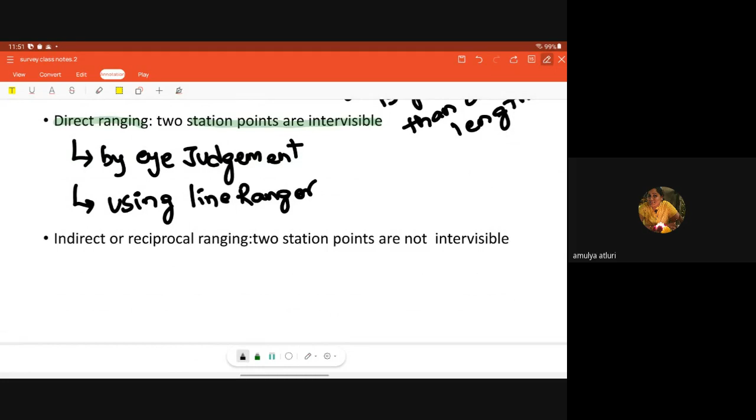What if we have obstacles and both stations are not visible? Then we go for indirect ranging or reciprocal ranging, where the two station points are not intervisible. For suppose this is the case - this is a hill, with points 1, 2, 3 and 4. So these are not intervisible, right? Then what we will do is ranging by help of the random line method.

Random line method is used to establish the intermediate station by reciprocal ranging. So these are the two types of ranging: direct ranging and indirect ranging.

As discussed in the previous class, there will be errors while doing survey - instrumental errors, personal errors, accidental errors, which we have discussed in the last class. Now, what are the errors due to an incorrect chain? When my chain is too long, the measured distance is less. When my chain is too short, the measured distance is more.

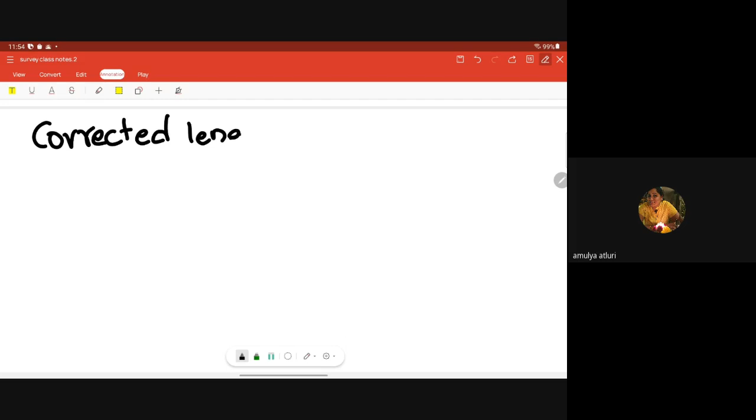Got it? Now let's deal with the corrected length, area, and volumes. How do we find the corrected length? What is the formula? Corrected length: let's suppose l equals l dash into L dash by capital L, by small l. What is this terminology? L dash is nothing but the measured length.

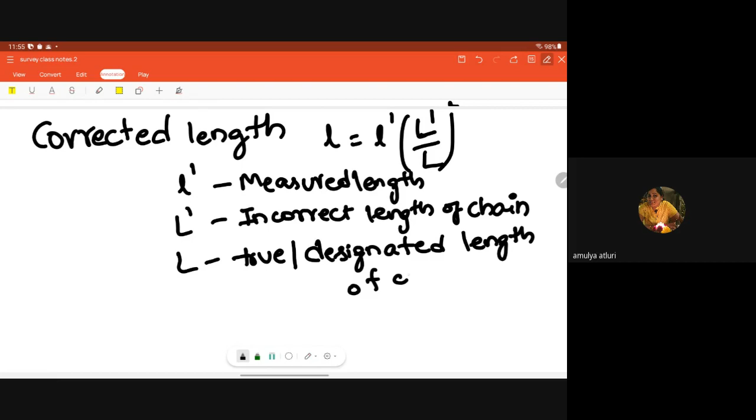Capital L dash is the incorrect length of chain. L is the true or designated length of chain. What is L dash? How do we get the incorrect length of chain? L dash is nothing but L plus delta L - true length plus the error, delta L, the change in length.

L dash is equal to L plus delta L. So if I do L dash by L, then it's L plus delta L by L, that is equal to 1 plus delta L by L. Let's take this delta L by L, or 1 plus delta L by L, as E - it's nothing but the error.

Then what goes with L? L is equal to L dash of 1 plus E. Got this? So this is your corrected length: corrected length L equals L dash of 1 plus E, where L dash is measured length, and E is the error, calculated by delta L by L, the change in length over the true length.

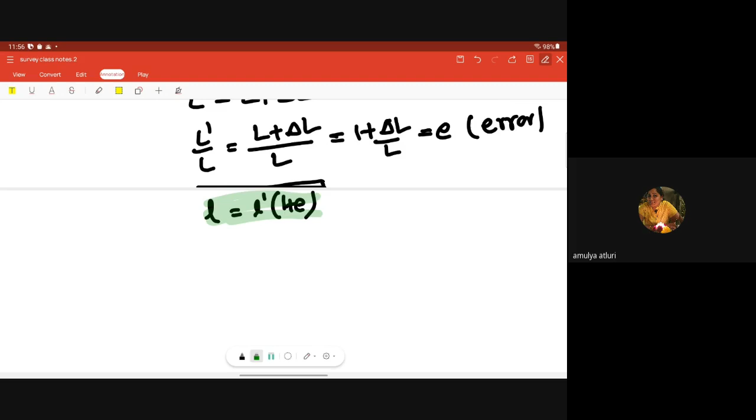Next is corrected area. Corrected area A is nothing but A dash into L dash by L whole square. What is A dash? The measured area. L dash is the incorrect length of the chain, L is the true length of the chain. So I can write corrected area A is equal to A dash into 1 plus 2E.

Next, corrected volume.

So corrected volume V is equal to V dash into L dash by L whole cube. So we can write this as V is equal to V dash into 1 plus 3E.

Got it? Now give me the values for corrected length. Here we will write a summary. L is equal to L dash into 1 plus E. Corrected area A is equal to A dash into 1 plus 2E. Corrected volume V is equal to V dash into 1 plus 3E.

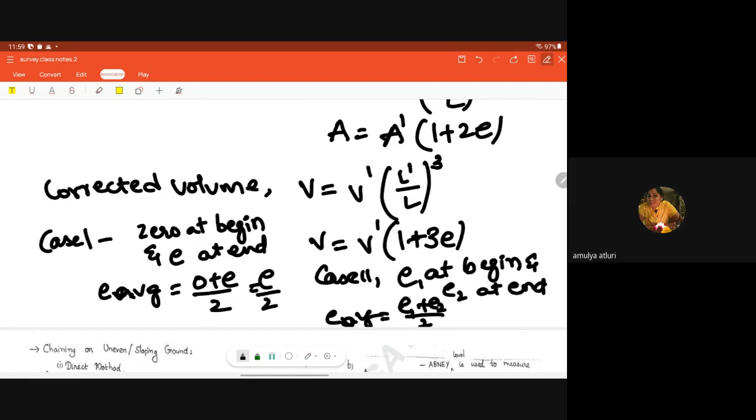In case 2, if we have error E1 at the beginning and E2 at the end, then my E average is E1 plus E2 by 2. This E must be the average. Here E is nothing but E average.

Got it? These are the corrections, corrections for incorrect chain. Next, chaining on uneven and sloping ground.

As you all know, our earth is not a flat surface, we have an undulated surface, right? So because of undulations, there will be error in the chaining because the chain won't be flat. There will be some undulations, sagging, pulling, and like that we will get some errors, right?

So what do we do if we chain on uneven or sloping ground? For example, a hill like this, if we want to calculate the length, direct this distance d, then we will go for the direct method. We will do the offsets like this, and this d can be calculated using summation of L1 plus L2 plus L3 and so on, 1 to n.

If I want, generally what we do is measuring down the hill is easier than going up the hill. If I want to measure this distance, I will just go down, this is easier than going up. So this is the direct method where we can project projections and calculate the length.

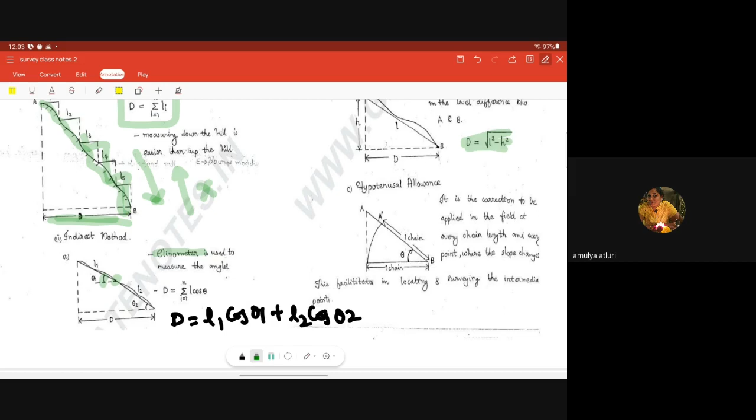Next, hypotenuse allowance. What is that? It is the correction to be applied in the field at every chain length and every point when the slope changes, where the slope changes. This facilitates locating and surveying the intermediate points. As you can see, I can chain till here only.

So this AA dash is my error. Wherever the slope is changed, there may not always be right angular things. So my chain can only go till here because of this curve. Then AA dash is my hypotenuse allowance.

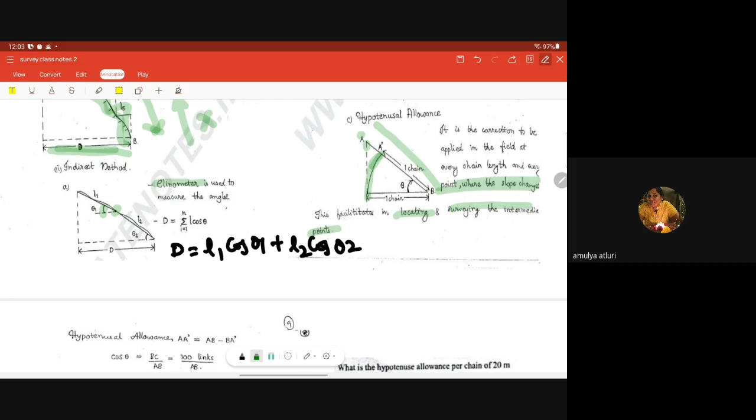How do we calculate hypotenuse allowance? A dash is equal to, from this triangle you can see, AA dash is equal to total AB minus BA dash. So hypotenuse allowance AA dash is equal to AB minus BA dash.

Then how do we calculate theta? Cos theta is equal to BC by AB. This BC, we take one chain which has 100 links. So that BC is nothing but a chain having 100 links.

Generally, as we discussed in the previous class, metric chains are of 20 meters and 30 meters. For 20 meters chain, we have 100 links. So I'm considering this BC as 100 links divided by AB. So AB is equal to 100 secant theta links, it is 1 by cos theta secant.

And when the slope is given as 1 by n, not as theta, this theta is generally considered as tan theta, and it is considered as 1 by n, slope, opposite side by adjacent side. So AA dash is equal to 50 by n square links. So 50 by n square into the measured length will give you the hypotenuse allowance when we measure with a 20 meters metric chain.

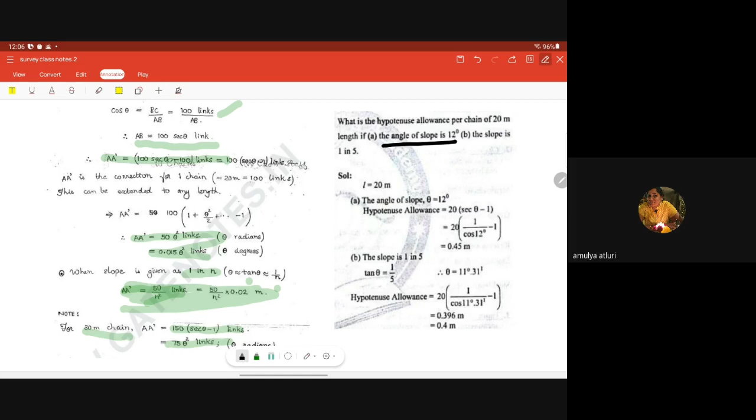So this is one of the most asked questions. Let's see one example. What is the hypotenuse allowance per chain of 20 meters length if the angle of slope is 12 degrees, and the slope is 1 in 5? So we are given the length of the chain equal to 20 meters, and the angle of slope, that means theta is equal to 12 degrees. They are asking us to calculate hypotenuse allowance.

As we know, the hypotenuse allowance is equal to the measured length into secant theta minus 1. So it is given chain of 20 meters length, so it is 20 into secant theta minus 1. Substitute theta as 12 degrees, then we get the answer as 0.45 meters.

And in the second case, the slope is given as 1 in 5, it's like 1 by n. As we discussed, theta we can take as tan theta. Tan theta is equal to 1 by 5. So from that, theta is equal to tan inverse of 1 by 5, then the value is 11 degrees 31 minutes.

So what is the hypotenuse allowance in this case? How much length did we measure? 20. So 20 into secant theta minus 1, that is 20 into secant of 11 degrees 31 minutes, so 1 by cos 11 degrees 31 minutes, minus 1. So here comes your value, 0.396 meters.

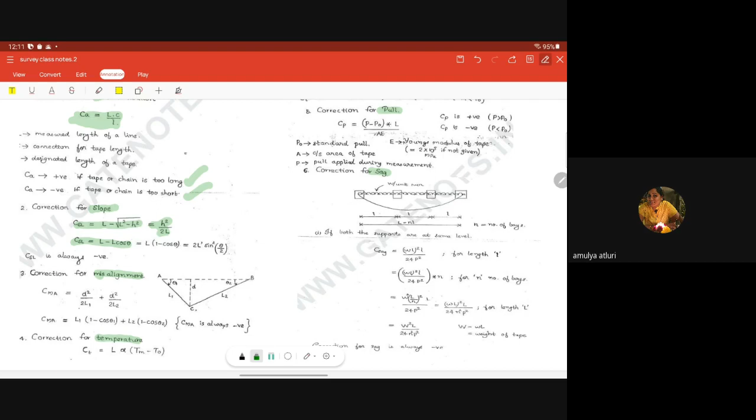Next, correction for slope. That is equal to L minus root of L square minus H square. Or if it is given in theta, if you know the slope, then CSL is equal to L minus L cos theta. If it is given in height, then correction for slope is equal to H square by 2L. If I get that in thetas, then CSL is equal to L into 1 minus cos theta.

Next, correction for misalignment. You can see if they are not in the same line, if my 2 points are not in the same line, if it is like this, then it has two different slopes, here theta 1 and theta 2. So if I join the points, this line is not straight. This is not giving 90 degrees. Here we will get theta 1 and theta 2, two different angles.

So correction for misalignment, CMA is equal to d square by 2 into L1 plus d square by 2 into L2. Got it? And if my d is given, and if thetas are there, then I can do it like CMA is equal to L1 into 1 minus cos theta1 plus L2 into 1 minus cos theta2. CMA, you need to remember, is always negative.

Correction for misalignment is always negative. That is a cumulative error, sorry, compensate negative error. Correction for misalignment is always negative. You need to remember it.

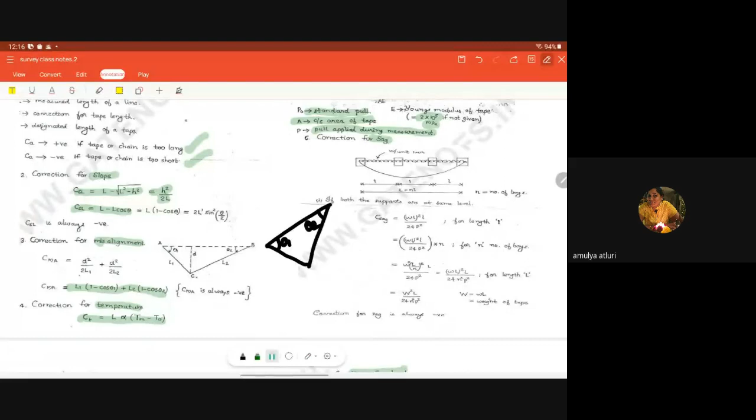So let's consider this as L, and this total length is equal to N into L. If both supports are at the same level, then my C sag is equal to WL whole square into L divided by 24 P square. What is this WL? Yes, this WL is nothing but the self weight of the tape.

Self weight is W, and it is a uniformly distributed load. Hence, it is a UDL. We will consider the whole load as W into L. So correction for sag is WL whole square into L divided by 24 P square. This is your correction for sag. If my tape is of length L, and we have used it for n number of bays, then we will multiply it with n.

If n is the number of segments of the bays, we multiply it with n. After simplification, this small L is nothing but capital L by N. So W square into L by N whole square into L divided by 24 P square, and on solving, we get it as WL whole square into L divided by 24 N square P square.

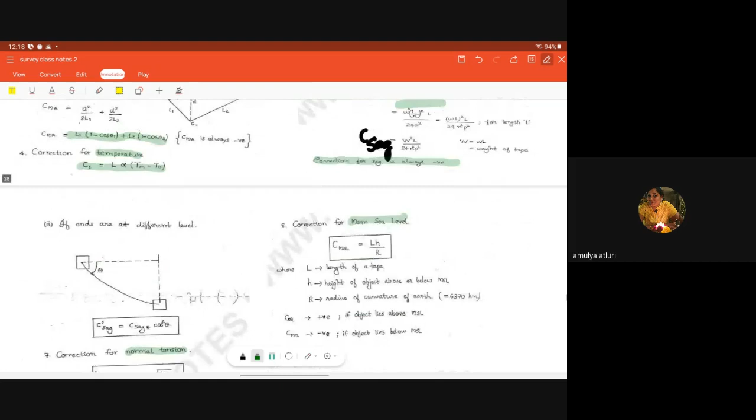If my ends are at different levels, then C sag is equal to C dash sag. My ends are at two different levels, so C sag equals C sag into cos square theta, where C sag is W square L by 24 N square P square into cos square theta.

Now, what is the correction for normal tension? When we hold the chain between two points, tension is developed, an outside force that develops in the chain. So what will be the correction for normal tension? Pn is equal to...

Pn is equal to 0.204 W into root AE divided by root of Pn minus P naught. Here Pn is the normal tension, P naught is the standard pull, W is the total weight of the tape, A is the cross-sectional area of the tape, and E is Young's modulus of the tape. This is the correction due to normal tension.

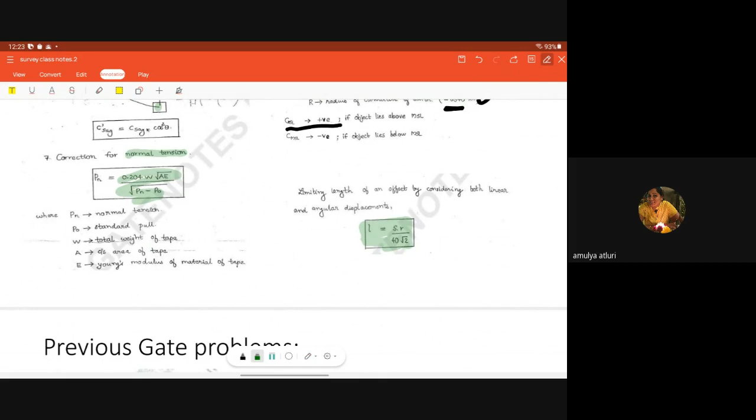Next is limiting length of offsets. Generally, we project offsets like that from the points and calculate while ranging, so there will be some limiting length of the offsets. The formula is limiting length of offset L equals S into R divided by 40 root 2, considering both linear and angular displacement. You need to remember this.

Now let's deal with a few previous GATE problems. We can expect a question from this topic, errors and their adjustments, either in the first session or here. So let's solve an example from previous GATE problems.

A steel tape of 20 meters long, standardized at 550 Fahrenheit, was used for measuring a baseline. The temperature during the measurement was 300 Fahrenheit. The coefficient of linear expansion of steel, alpha, is given as 6 into 10 power minus 6 per Fahrenheit. Generally we measure per Celsius, but here it's given in Fahrenheit, no issue. They are asking for the correction for temperature per tape length. So what is the correction for temperature first?

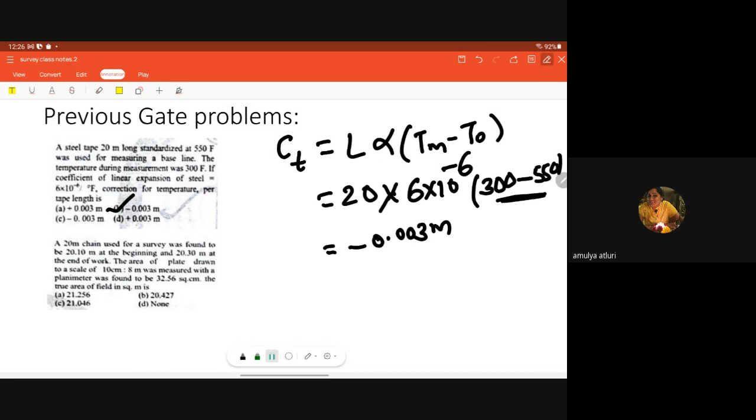Next, let's go with another problem. A 20 meters chain used for survey was found to be 20.10 meters at the beginning and 20.30 meters at the end of work. The area of the plate drawn to a scale of 10 centimeters is to 8 meters was measured with a planimeter and found to be 32.56 square centimeters. Find the true area of the field in square meters. So it is given initially the chain length is found to be 20.10 and at the end 20.30, and the area measured is 32.56 with a scale of 10 centimeters to 8 meters. So they are asking the true area of the field in square meters.

Okay, got the point? So now we need to calculate the measured length first, L dash. How do we do? It is 20.10 plus 20.30 divided by 2. I have given you average error we need to take. So 20.2 meters. So this is the average error average.

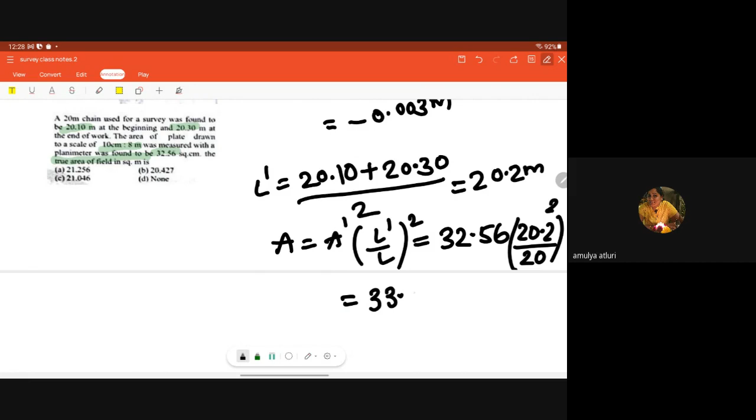33.21 centimeter square. So this is your corrected area, right? So this is your corrected area. Corrected area is equal to 33.21 centimeter square.

They have told the scale is 10 centimeters is equal to 8 meters, right? So then what is 1 centimeter? 0.8 meters. Now they are asking the corrected area in square meters, so I need to convert this to square meters. So 33.21 centimeter square is equal to 33.21 into 1 centimeter is 0.8 meters, 0.8 whole square. So it is 21.256 meters square. So this is your correct area in meter square.

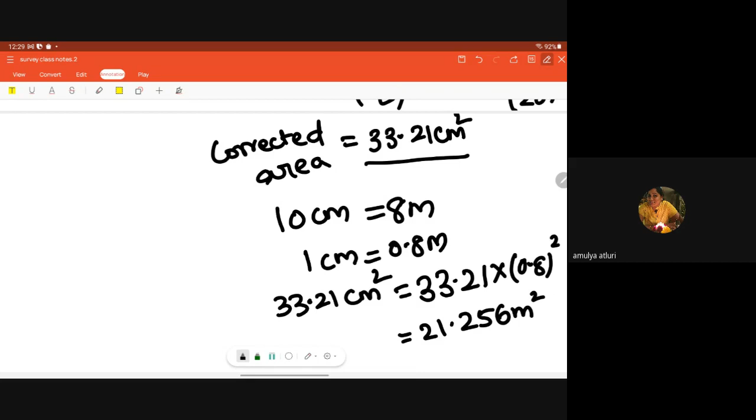What they have asked, the true area of field in square meters. So what you got? Answer as 21.256. So first one is your answer, 21.256. I think you got it.

How do we measure the L dash? It is like cumulative error, right? We need to take the average of the error at the end and at the beginning. After that, I have calculated corrected area using the formula, and with the scale we have changed, converted the true area into meters, square meters.

So here ends your first part, that means linear measurement. So linear measurement part here ends. Now let's go to the angular measurements.

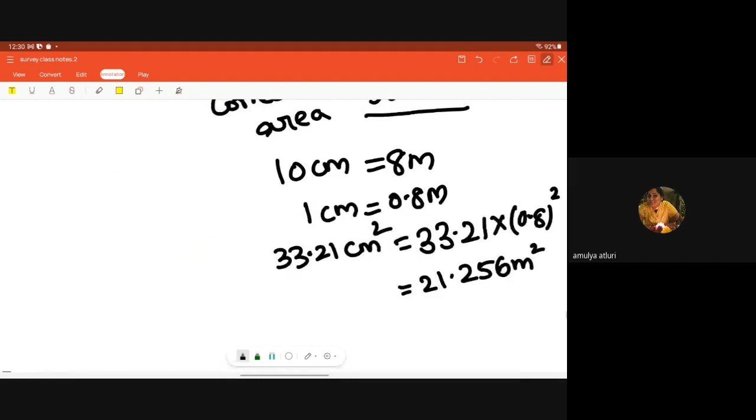So in linear measurements, what are the equipments used for the linear measurement? What are the errors occurred while we are measuring? And how do we correct it? We discussed all these things here, and we discussed two examples also.

So how do we go with the angular measurements? We use compass. Previously we have dealt yesterday's class with help of compass, with help of theodolite. With help of total station we can measure the angle, right? So first, with help of compass, how do we measure the angle? And how do we get the direction? With that measurement we can get the direction of measurement, right? So direction of that line can also be measured.

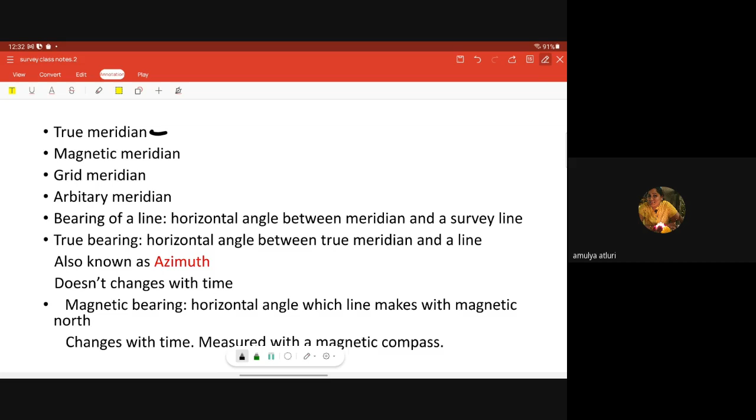So let's go into some terminologies for the magnetic compass survey and all. There are different types of meridians: true meridian, magnetic meridian, grid meridian, arbitrary meridian. What is true meridian? True meridian is nothing but, if it is a point, a great circle passing through the geographical north and geographical south of the point, passing through the geographical north pole and south pole of Earth's surface.

Line joining geographical, that means Earth north and south, geographical north and south pole of Earth's surface, is called true meridian. Okay.

So what is magnetic meridian? It is the direction which shows the magnetic north when suspended freely. It shows magnetic north when suspended freely.

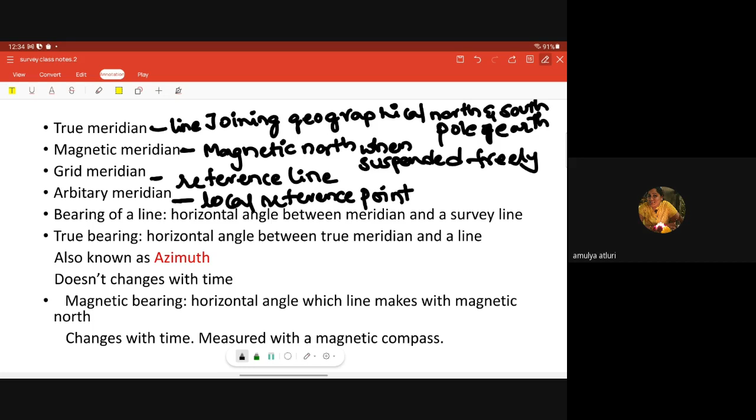Next point is bearing of line. This is very important. What is bearing of line? It is the horizontal angle between the meridian and a survey line. That is called bearing of line.

What is true bearing? True bearing is the horizontal angle between the true meridian and the survey line. It is also known as azimuth, you need to remember it. Generally, if they want to trick you, they will give the azimuth of a line, meaning the true bearing of the line, that is the angle made with the true meridian.

It doesn't change with time, so it is constant everywhere. My true bearing is constant everywhere in the universe. It doesn't change with time, and it doesn't change with location.

Next, what is magnetic bearing? It is the horizontal angle which the line makes with the magnetic north. What is magnetic north? When the magnet is suspended freely, it has a tendency to point in its north direction, showing its magnetic north when suspended freely. So the horizontal angle which the line makes with the magnetic north is magnetic bearing.

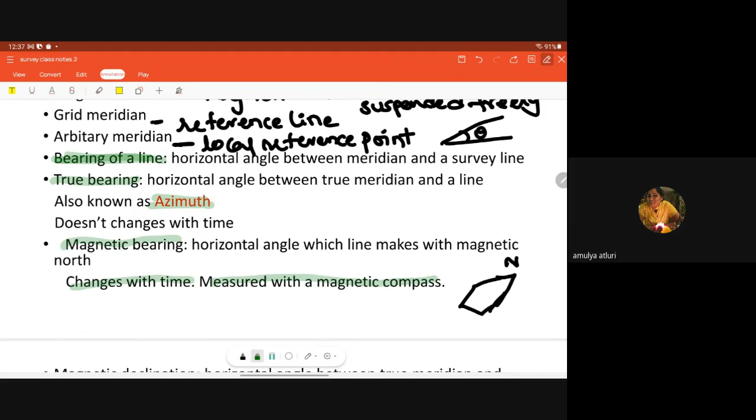It changes with time, so it is not constant. Because at our place the magnetic flux is different; in another country the magnetic flux is different, and the direction and time are different, so it will be suspended in a different direction. Magnetic bearing is not constant everywhere; it changes with time, and it is measured with the help of a magnetic compass.

Next, very important one: magnetic declination. What is magnetic declination? The horizontal angle between the true meridian and magnetic meridian at a particular place is called magnetic declination, or dip.

Let's consider north, east, west, south, and this is my survey line A. This is your true north, and the line passing through this is called the true meridian. This is the meridian passing through the magnetic north, the magnetic meridian. So what is my true bearing? This one. And this one is my magnetic bearing. This is nothing but theta, the dip declination.

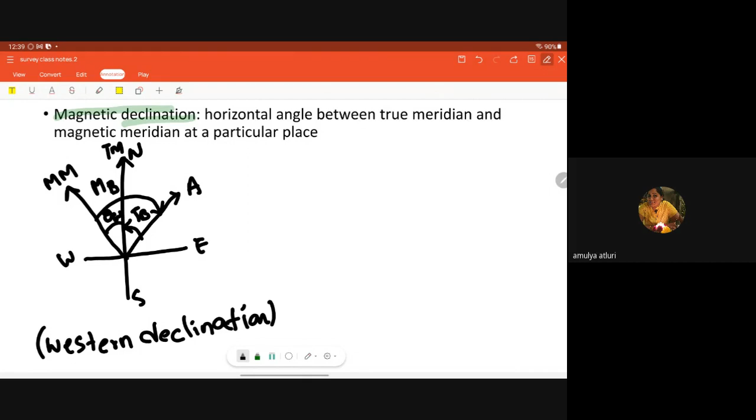Dip theta west, this is western declination. So how do we calculate MB? Magnetic bearing is equal to true bearing plus western declination, right? So true bearing in this case is equal to magnetic bearing minus theta W. This is your declination when the declination is a western declination.

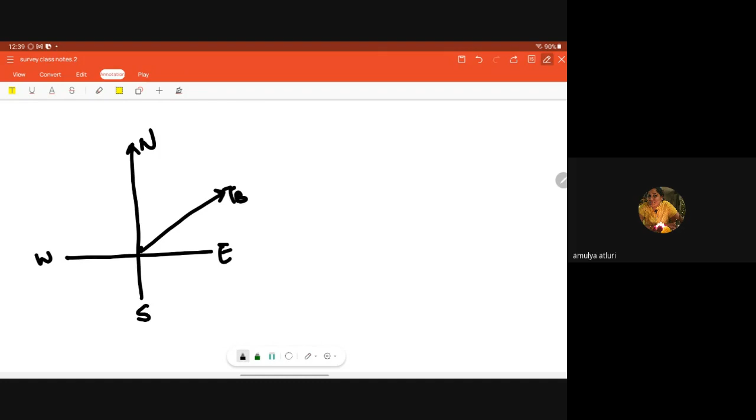Now we consider eastern declination. We'll draw one line: north, east, west, and south. This is your north. If your true north is here, this is your TB, true bearing, and here is your magnetic bearing, on this survey line. What is your true bearing? The angle between the true north and your survey line - this is TB. So what is your magnetic bearing? The angle between the magnetic meridian and the survey line - this is MB. So what is this difference? This is dip, declination, magnetic declination - this is eastern declination.

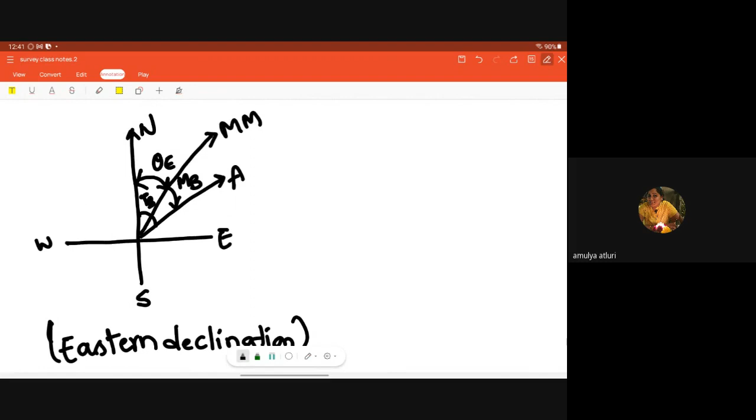My magnetic bearing is equal to true bearing minus theta e. So what is my true bearing? Magnetic bearing plus theta e. Got it? This is your magnetic declination in these cases. So they will ask you, sometimes they will give the true bearing and magnetic bearing, and ask you to calculate theta, the magnetic declination. And sometimes they will give magnetic declination and any one of true bearing or magnetic bearing, then ask you to calculate. So there will be problems like this.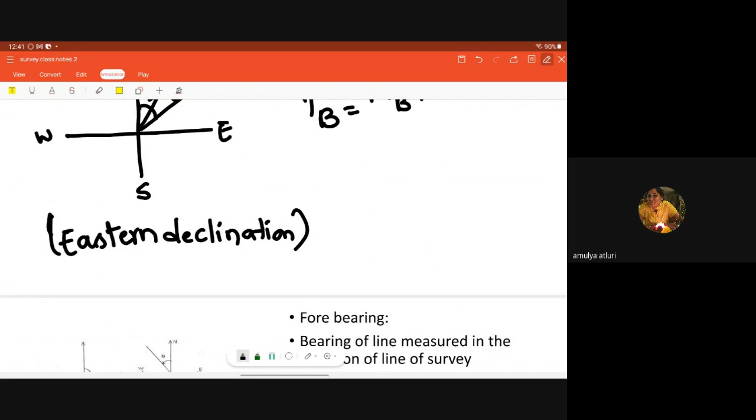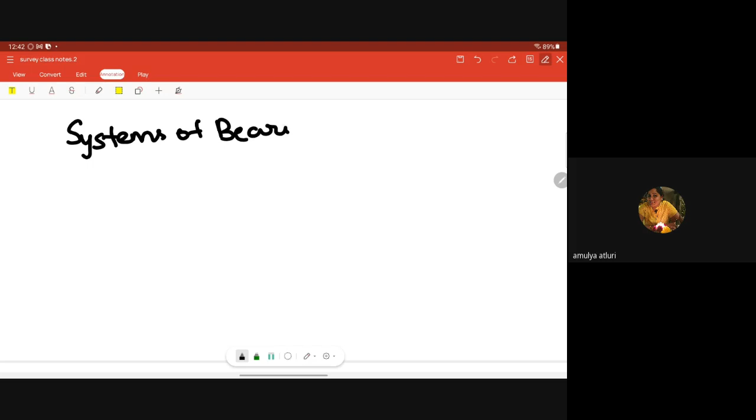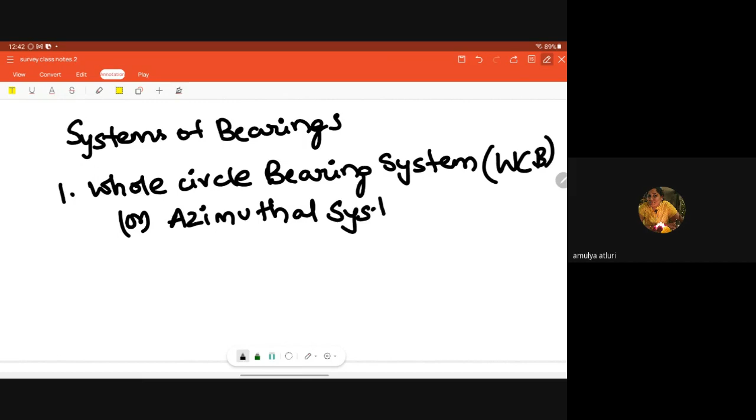Next, what are the systems of bearings? Systems of bearings: one, whole circle bearing. This is also called the WCB system or azimuthal system. The second one is quadrantal bearing, or reduced bearing system. So these are the two systems of bearings: whole circle bearing system, also called WCB or azimuthal system, and quadrantal bearing or reduced bearing system.

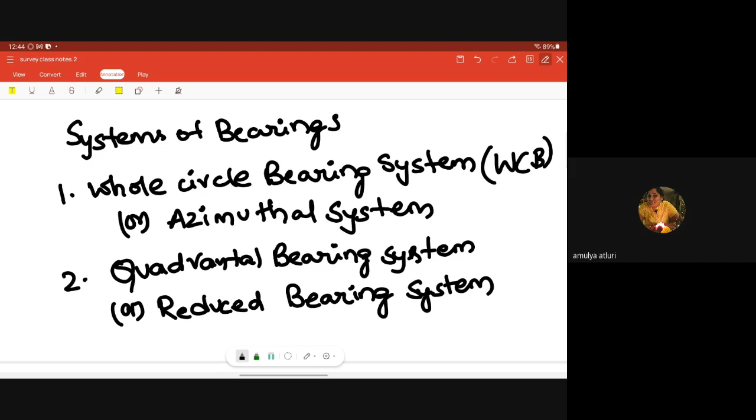The bearing of a line will be measured with respect to north or south, whichever is nearer. We will consider that as the bearing of the line. If it is near to the north, we go with the bearing with respect to north. If it is nearer to the south, then we consider the bearing with respect to south.

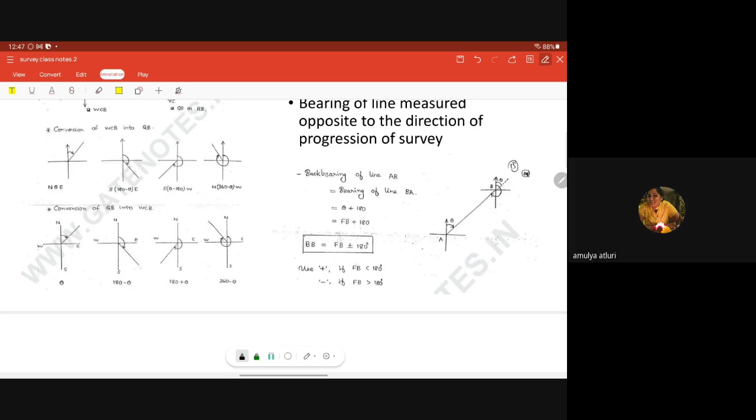We'll just consider the poles, the two poles, and the angle between them in conversion. Second, conversion of QB into whole circle bearing. QB is reduced bearing; conversion of reduced bearing into whole circle bearing. If this is the case, what do we do? We'll just give the theta. If my survey line is present between south and east, then it is like 180 minus theta. In this case, 180 plus theta, 360 minus theta. So these are the conversions you need to remember, memorize, and practice: conversion of whole circle bearing into reduced bearing, and vice versa.

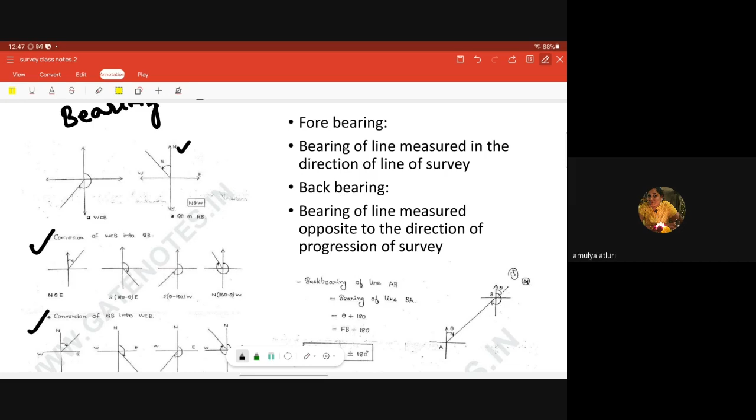So what is fore bearing? Bearing of a line measured in the direction of survey is called fore bearing. If the bearing of a line is measured opposite to the direction of survey, opposite to the progression of survey, then it is called back bearing. Got it? So here, this is my fore bearing, measured in the direction of survey. And this is my back bearing, measured opposite to the direction of survey.

Let's see one example. They're asking for the back bearing of line AB. Back bearing of line AB is nothing but the bearing of line BA, right? So we can see it in the progression. What is the angle? Theta. So bearing of line BA is theta plus 180. This is your theta, and this is the horizontal angle, 180 minus theta... so theta plus 180. What is this theta? Theta is nothing but your fore bearing, the angle measured in the direction of survey. So from this you understand that back bearing is equal to fore bearing plus or minus 180 degrees. We use positive if my fore bearing is less than 180 degrees, negative if my fore bearing is greater than 180 degrees. Got it? So my back bearing is equal to fore bearing plus or minus 180.

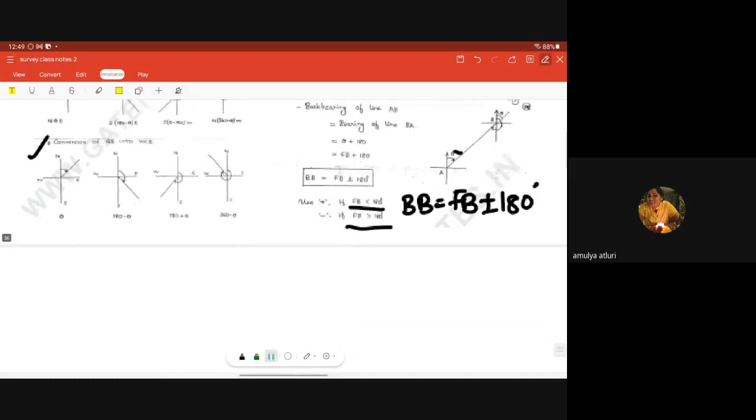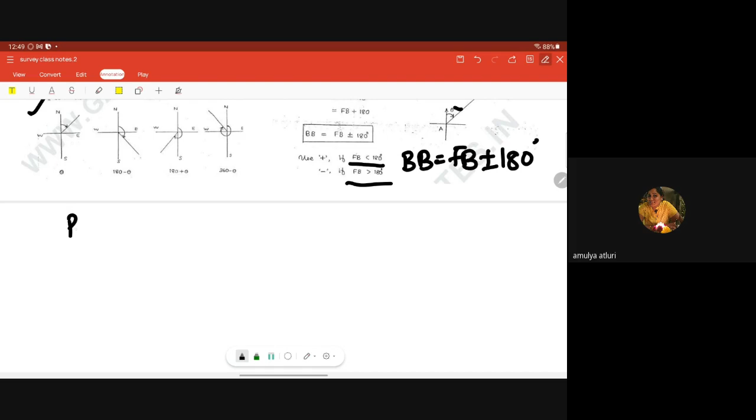So there are two types of compasses generally considered in compass survey: that is the prismatic compass and the surveyor's compass.

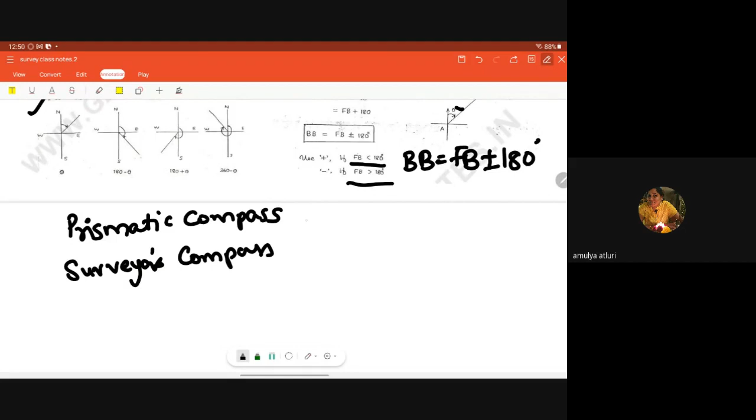What is the main difference between prismatic compass and surveyor's compass? The prismatic compass has a broad type of needle, like this. The surveyor's compass has an edge bar type needle, like this.

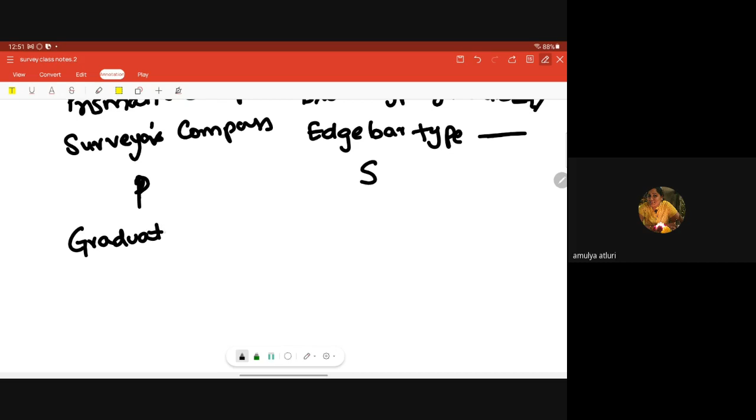Let's write the differences between prismatic and surveyor's compass. In the prismatic compass, the graduated card ring is attached to the needle. In the surveyor's compass, the graduated chord ring is attached to the compass box. The gradations generally follow the WCB system and the QB system. These are the important points. There are a lot more differences, but you need to remember these two points, that's enough.

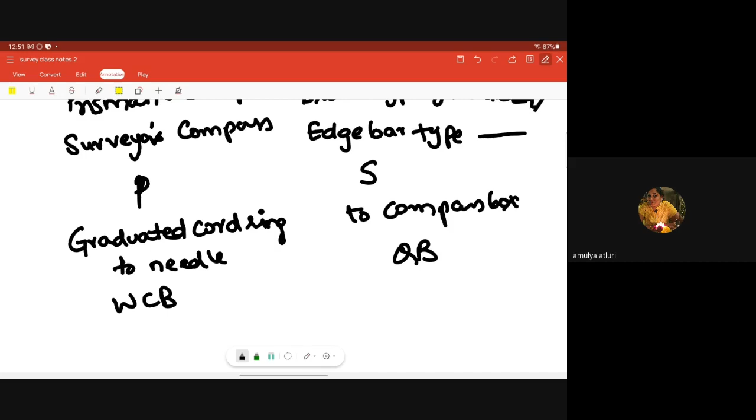So these are the different types of compasses we generally use. Now, what are the temporary adjustments in this type of survey? They are centering, leveling, and focusing the prism. These are the temporary adjustments we do in compass survey to calculate the angle.

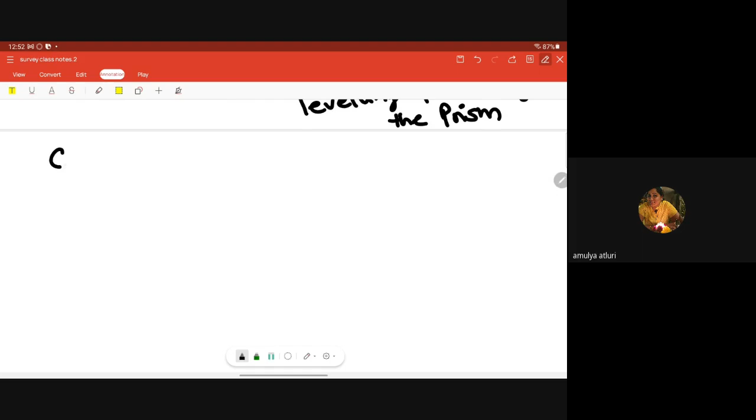Next, calculation of interior angles from given bearings. How do we calculate interior angles from given bearings? Calculation of interior angle from given bearings.

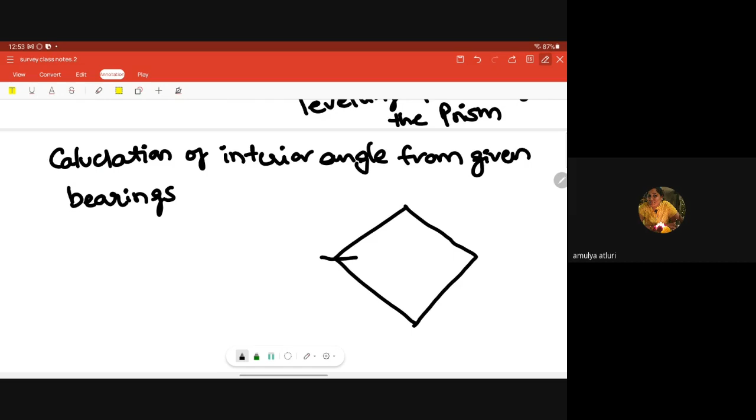This is your true north, for this place it is your north. A, B, C and D. I want to calculate angle B. This is from true north to your survey line, this is your angle, right? So from true north to the survey line, this is your true bearing, and this is your internal angle. This is angle B, and this is the back bearing of AB.

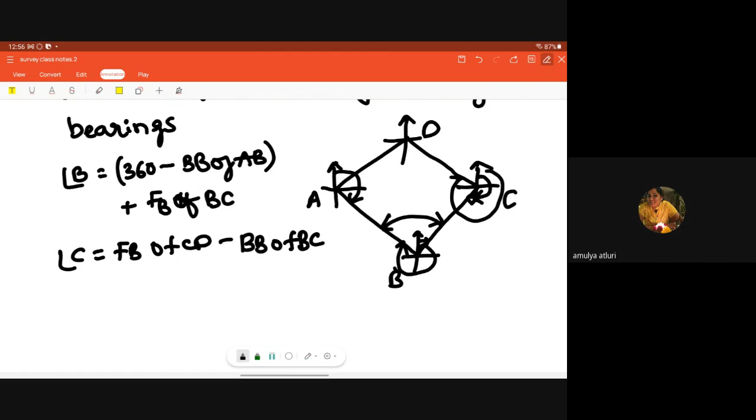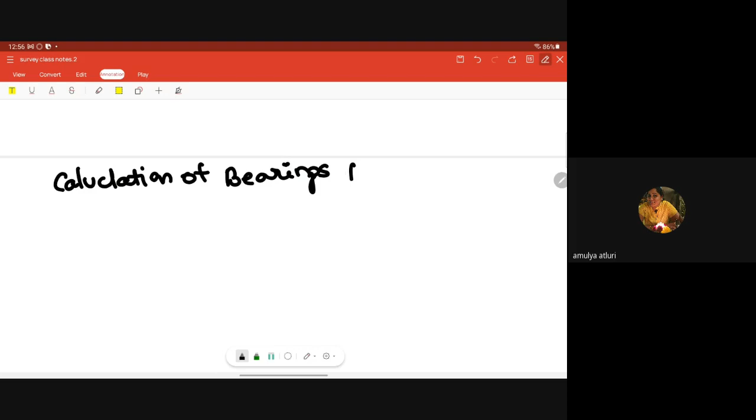From this we can calculate interior angles from given bearings. Now, how do we calculate bearings from given interior angles? Calculation of bearings from given interior angles. If interior angles are given, then how do we go with the bearings?

A, B, C and D. If I know all these interior angles, how do we calculate bearings? Forebearing of BC is equal to back bearing of AB plus angle B. Look at this: forebearing of BC is equal to back bearing of AB plus angle B.

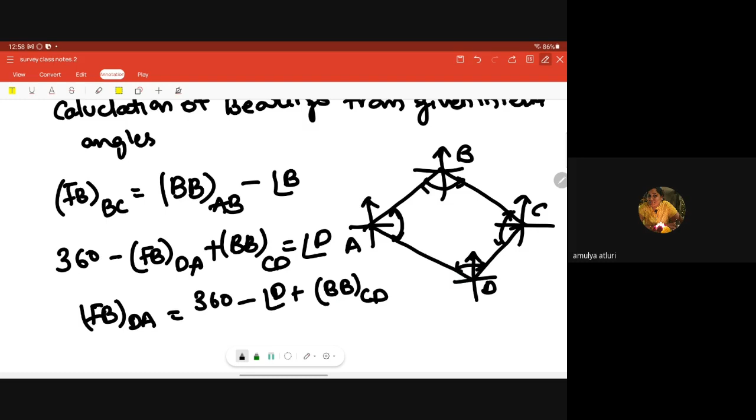Next, 360 degrees minus forebearing of DA plus back bearing of CD, what is this angle? 360 degrees minus forebearing of DA plus back bearing of CD is nothing but angle D, right? So forebearing of DA is equal to 360 degrees minus angle D plus back bearing of CD. You can check it. This is how we calculate the bearings from the given interior angles.

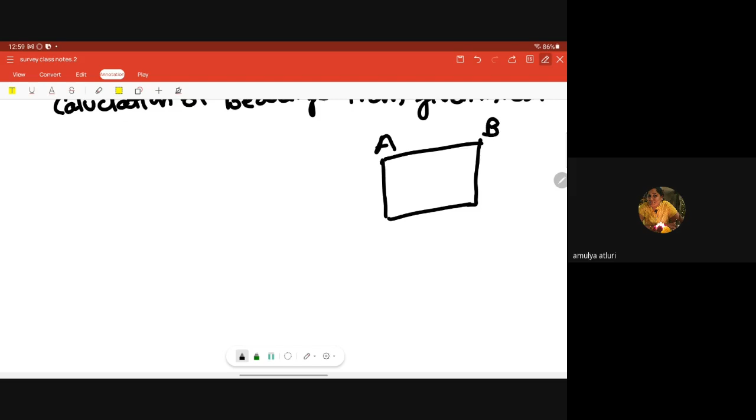Now let's take a traverse like this, a rectangular traverse. A, B, C, D. Now tell me, bearing of AB is equal to bearing of DC, and bearing of AD is equal to bearing of BC. Got it?

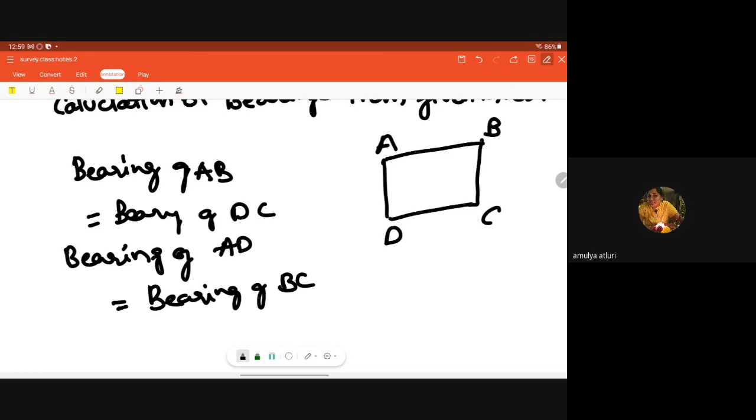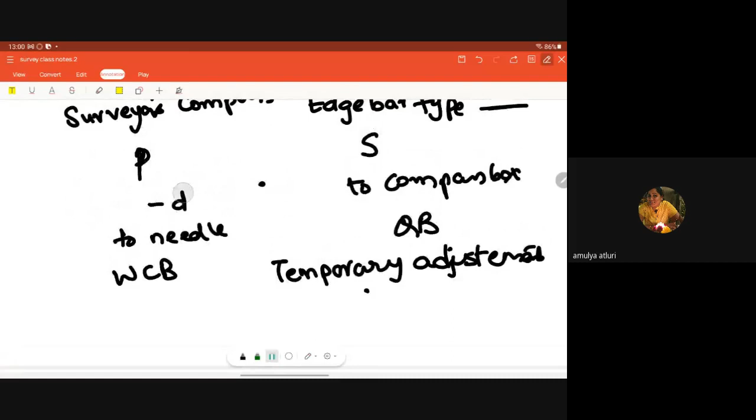So till now we have seen how we measure angles using compass, what adjustments we make, the different types of compasses used, what bearings are, how we calculate angles in different coordinate systems, how we calculate internal angles if bearings are given, and how we calculate bearings if internal angles are given. So we have dealt with angular measurement till now.

Declinations we have seen, right? Magnetic declination, eastern declination and western declination. These declinations also have variations like diurnal variations and annual variations. As I told you, they won't be constant. So there are diurnal, annual, secular, and irregular variations. Generally, irregular variations occur if there are any natural calamities. Secular variation happens every 250 years, generally 5 to 10 seconds per year. So these are the variations.

And what is isogonic lines? You need to know it. Isogonic lines is the line joining the points of same declination. So those lines are called isogonic lines.

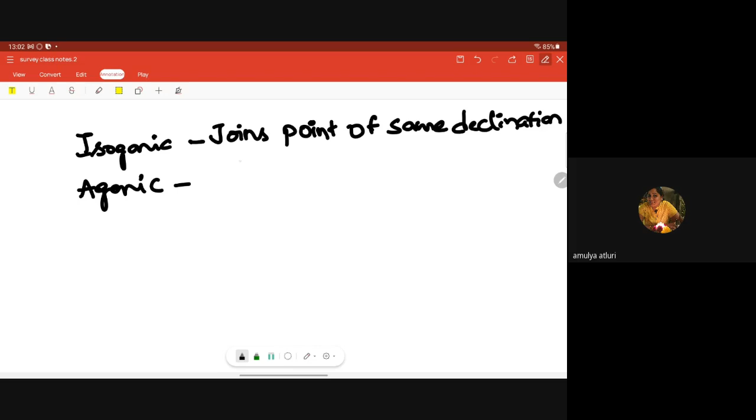Agonic lines. So what is an agonic line? It is the line joining the points of zero declination. That means when the magnetic bearing, magnetic meridian and true meridian coincide, then we have zero declination. So the line joining those zero declination points is called an agonic line.

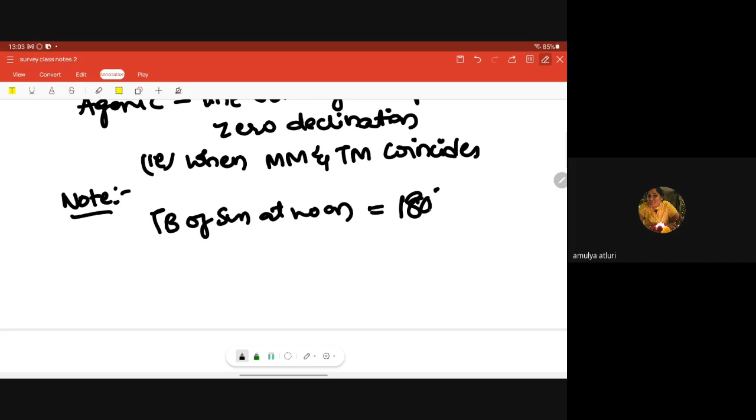Sometimes you need to note this in problems, as they try to trick you. They will not mention the true bearing directly, they'll just mention the true bearing of the sun at noon. In that case, what value do you take? True bearing of the sun at noon is 180 degrees. Also, true bearing is also known as azimuth. If they don't mention true bearing and just say azimuth in the question, then you need to consider it as true bearing.

If the longitude is greater than the standard meridian, then the difference between them will be added to the standard time to get the local mean time.

Next, one important topic is local attraction. So what is this local attraction? This is an error. It is the deviation of the magnetic needle due to the influence of magnetic attracting materials like fences or steel materials. If the needle is surrounded by them, it will fluctuate, causing an error in your calculation. That is called local attraction.

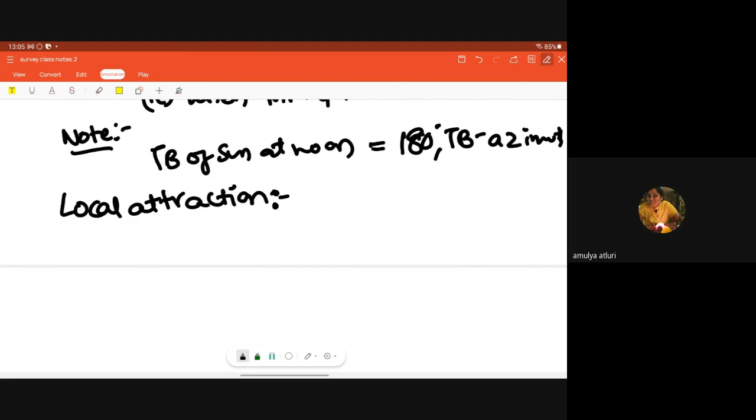So how do we detect this local attraction, how do we detect when there is an error? If the difference of forebearing and back bearing is not equal to 180 degrees, then there is local attraction.

So what is the correction for local attraction? They will ask for the correction for local attraction. So what do we do for corrections? We check the forebearings and back bearings of the different points given. If the forebearing minus back bearing is not equal to 180, then there is a correction needed. If the forebearing minus back bearing is equal to 180, then there is zero correction. If it differs, the value differed will be your local attraction.

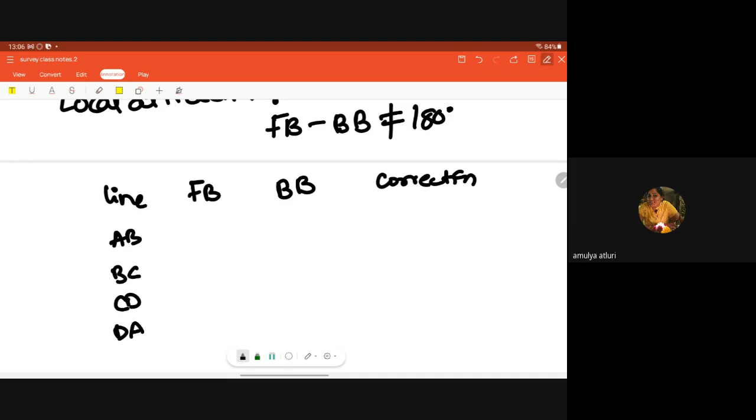Let's take an example: line, forebearing, back bearing, and correction. Line AB, BC, CD, DA. Values: 120 degrees 30 minutes, 299 minutes, 140 degrees 30 minutes, 320 degrees 30 minutes, 80 degrees, 261 degrees, 100 degrees 30 minutes, 281 degrees.

As you can see, you just draw the traverse AB, BC, CD, DA. So this is your forebearing, 120, and the back bearing. So for AB and BC, what is the angle?

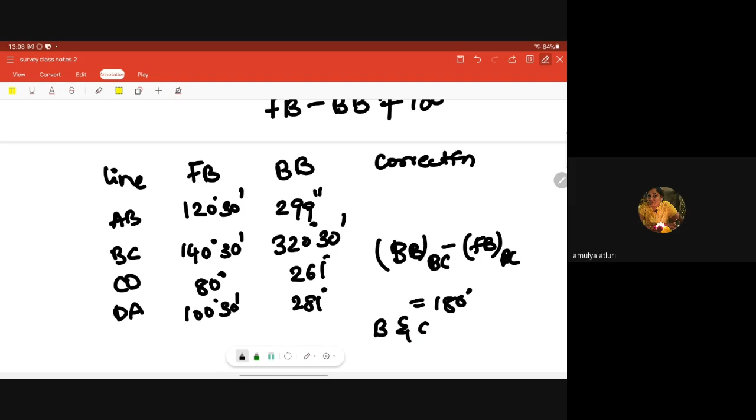We'll check forebearing minus back bearing, or back bearing minus forebearing. Let's check the back bearing of BC minus the forebearing of BC. If you check, it is 180 degrees. That means B and C are free from corrections.

And if we go with the forebearing of CD and forebearing of DA, there will be a 1 degree correction: minus 1 degree correction at D and minus 1 degree 30 minutes correction at A. You need to draw the traverse and check the forebearings and back bearings. Forebearing minus back bearing must equal 180 — then there is no local attraction and it is error free. If there are any errors, we need to add correction depending on whether it's more than or less than 180.

So these are the angular measurements.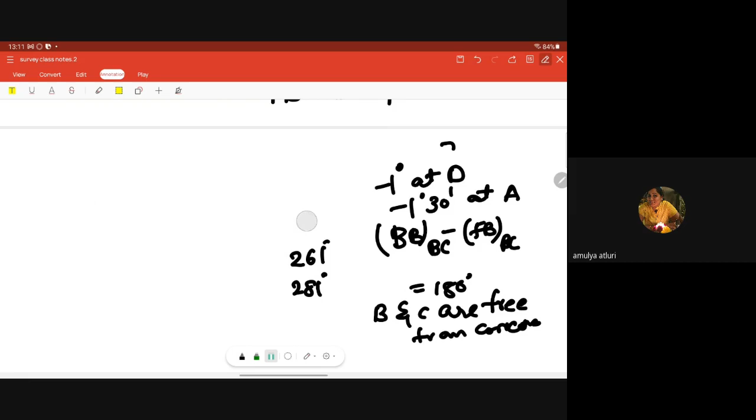So let's take one question. The magnetic declination at a place if magnetic bearing of the sun at noon is 184 degrees. So they are asking magnetic declination if the magnetic bearing of sun at noon is 184 degrees. They're asking declination. So what is declination?

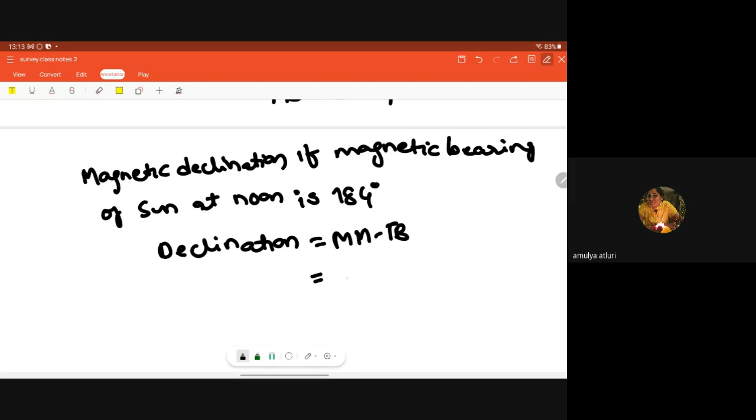It is nothing but magnetic bearing minus true bearing, or true bearing minus magnetic bearing, it is like plus or minus, you make it. So it is given 184 degrees, that is the magnetic bearing. What is the true bearing of sun at noon? It is nothing but joining the Earth's magnetic north and south at noon. It is like 180 degrees, I have told you earlier. So 184 minus 180 degrees, then my magnetic declination is 4 degrees west. Got it?

And they will ask you like this: if they will give bearings and they will ask internal angles. Okay, I will solve one problem.

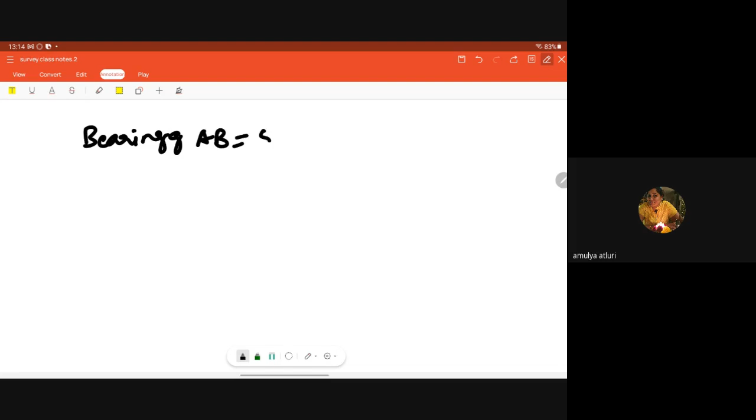They are giving the bearing of AB is equal to 50 degrees. Bearing of BC is equal to 310 degrees. Then angle ABC, angle B, they are asking. So how do we calculate? Generally angle ABC, angle B, is nothing but back bearing of AB minus forebearing of BC. So it is given bearing of AB is 50, forebearing is given 50. So what will be the back bearing? Back bearing of AB is nothing but 180 plus 50. And the forebearing of BC is 310 they have given. So back bearing of AB, 180 plus 50, minus forebearing of BC 310, that is 80 degrees. 80 degrees is my angle B. Okay, you need to do like this.

So till now, from the topics under discussion, we have dealt with principles of surveying. Just wait, I'll go with the first page. So till now we have dealt principles of surveying, and errors and their adjustment. What are the errors and their adjustments? Maps, scales, coordinate systems, distance and angle measurement. Okay, so till these topics we have covered.

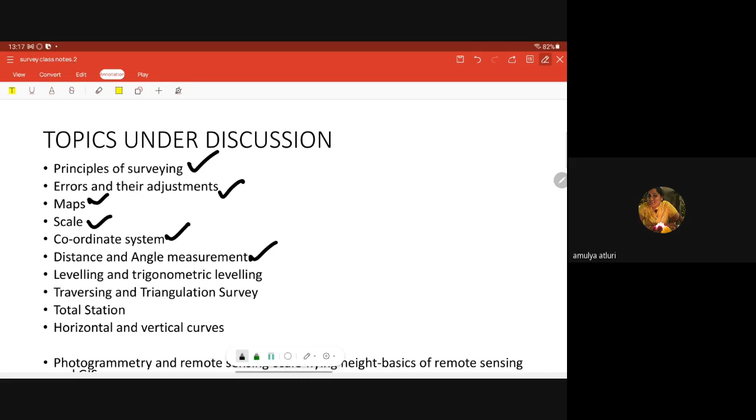Now we need to discuss leveling and trigonometric leveling. So what is leveling and what do we do in leveling? It is nothing but measurements in vertical planes. So leveling is nothing but the measurement of vertical planes, or elevations, or the difference of elevations between 2 points.

Just give me a second. So leveling, what is the principle of leveling? It is nothing but measurements in vertical plane.

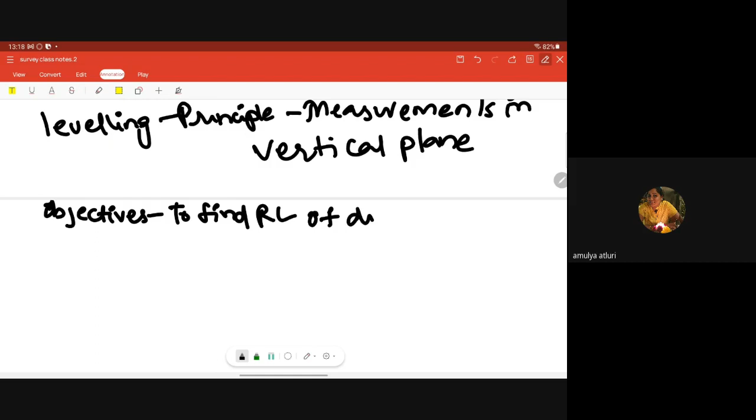So what are the objectives of leveling? It is nothing but to find reduced level, RL, of different objects lying on, above or below the earth's surface. So to find the reduced level of different objects lying on or above or below the earth's surface, we used to find the reduced level of that objects. Okay, and to establish points at a given elevation with respect to datum.

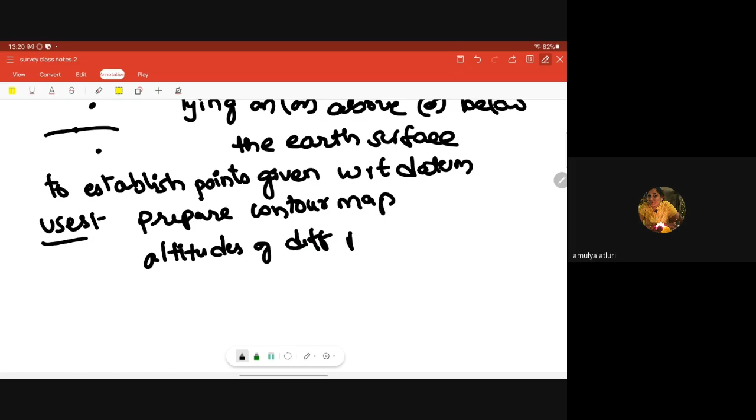Okay, so next, what are the uses of leveling? So with the leveled data, what we can do? We can prepare contour maps. We have dealt this in the last class. What is contour? Contour is nothing but the line joining the points of equal elevation. So with different leveling, we know the different points of different elevation. If we join the points of equal elevation, we can prepare the altitude contour map. Next, altitudes of different points. Altitude is nothing but height in general word. So for a hill, I want to know the height of this hill, the altitude of this hill. I can do this with help of leveling.

And next, to prepare layout of water distribution system, drainage system, etc. And to prepare longitudinal sections and cross sections of a project. So to know the cross sections of the project, we need longitudinal and cross sections of projects. So, these are the uses of leveling.

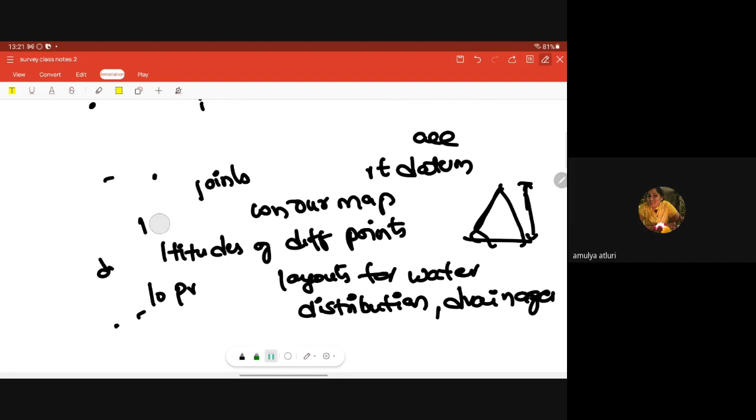So, till now we have dealt with the principle, objectives, and uses of leveling, right? So, what are the terms used in leveling generally?

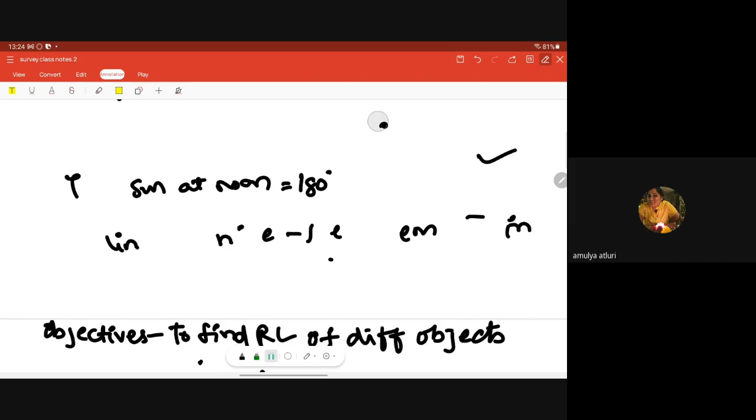Now, methods of leveling. There are different methods of leveling.

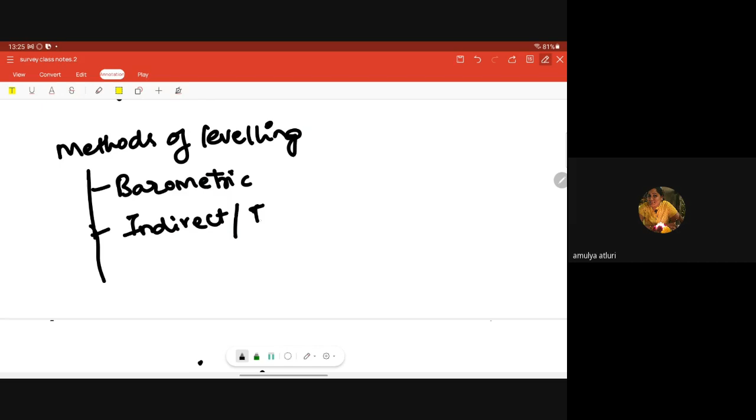The different methods of leveling are: barometric leveling, indirect or trigonometrical leveling, and spirit or direct leveling. These are the methods of leveling.

What is barometric leveling? In barometric leveling, the reduced level is determined based on the pressure difference between two barometric points, measured with the help of a barometer.

Next, indirect or trigonometric leveling: the heights and distances of various points are calculated by taking the vertical angles.

Next, spirit or direct leveling: the concept of telescope and spirit level is coupled here.

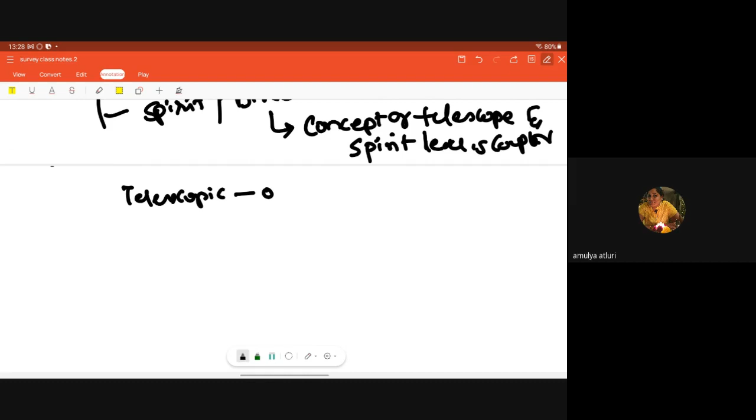What are the defects we can encounter? Telescopic defects, that means optical defects, magnification defects. There are two types. The magnification of a telescope is inversely proportional to the illumination of the lens.

Illumination of lens - illumination means the proper light requirement, which depends upon the quality of lens, magnification power of lens, and number of lenses used.

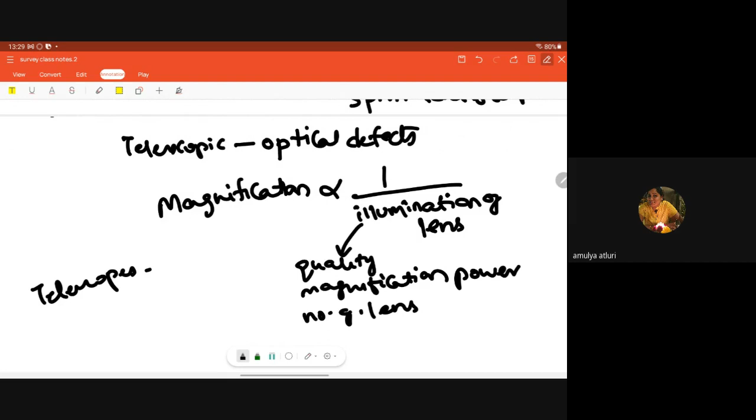There are two types of telescopes: external focusing telescopes and internal focusing telescopes. External focusing means focusing is done by the external movement of either the objective or eyepiece. Internal focusing telescope means the focusing is done internally by a negative lens.

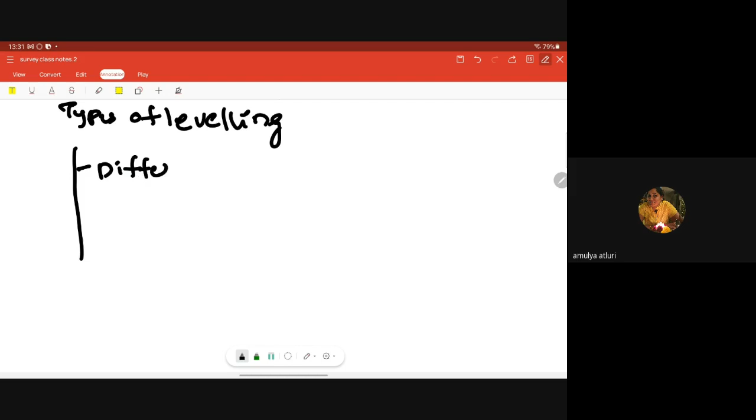The next topic is types of leveling. What are the different types of leveling? Differential leveling, also called fly leveling or check leveling.

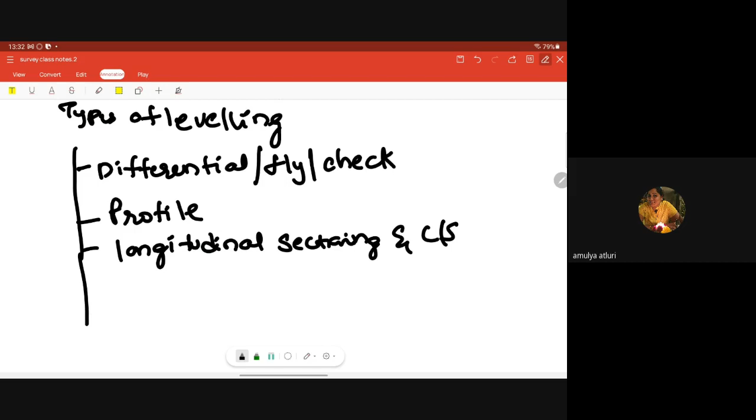Next is profile leveling - longitudinal sectioning and cross sectioning - precise leveling, and reciprocal leveling. So these are all the types of leveling.

We will deal with the terms and types of leveling in the next session. Thank you for your patient listening.